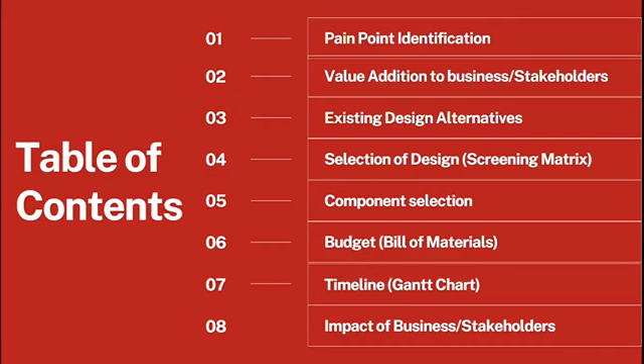The pain point with the current manual labor intensive task is the ergonomic issues with workers experiencing back pain due to lifting of heavy windshields. Furthermore, manual handling of the windshield poses chances of damage to it. Additionally, manual application of the sealant leads to material wastage as well as time wastage.

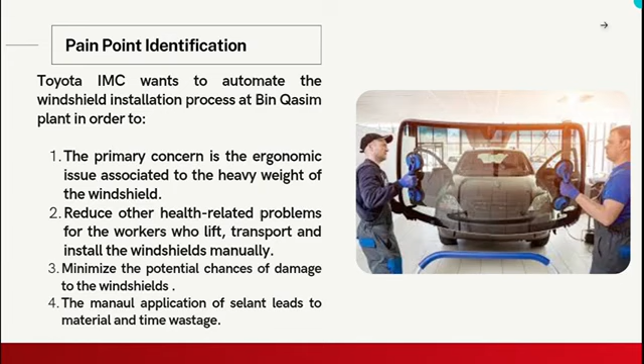Now we identify the value our solution adds to IMC as a business. Enhancing the safety and comfort of the workplace can improve worker satisfaction and morale, increase productivity, lower employee turnover, and result in better retention of skilled staff.

Streamlining the windshield installation process and reducing ergonomic strain on workers can improve overall efficiency. This leads to faster production times and lower costs with reduced material wastage of the sealant. Furthermore, increased expenses may arise from ergonomic problems as a result of worker injuries, lost productivity, and possible legal liability. Our solution would lower these expenses and boost the bottom line by proactively addressing these problems.

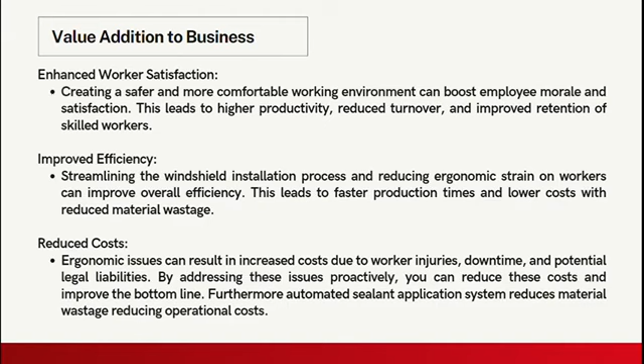Moreover, material wastage is decreased by automated sealant application systems, which lowers operating costs. Additionally, the automated system reduces chances of human error, increasing the quality of the windshield installation. This leads to less work for the quality control department as well as lesser warranty claims.

Furthermore, exhibiting a dedication to ensuring the safety and well-being of employees can offer a competitive edge. It can improve the company's standing as a responsible and progressive one, drawing in clients that respect morality and environmentally friendly business methods.

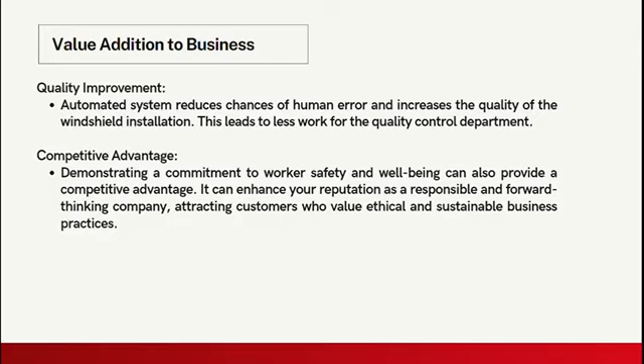We now talk about our system. On a broader level it can be broken down into two subsystems: the sealant application system and the transport system. The sealant application system applies the sealant on the windshield, and then the transport system lifts it from the sealant application station and transports it towards the car, where the worker slides it down and installs it on the car.

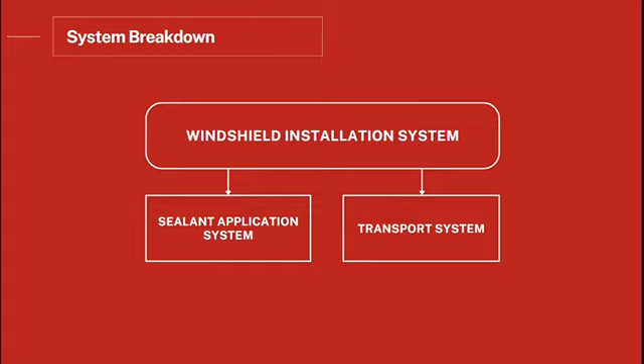We'll explain the system in detail in this presentation. We first go into the details of the sealant application system.

Currently, industry around the globe utilizes 6 degrees of freedom industrial manipulators for applying sealant to the windshield. Industrial manipulators offer a number of advantages: they are very time efficient and can accurately trace out the sealant trajectory, minimizing material wastage. Furthermore, they are very suitable for higher throughputs. However, these robots require their own space and cannot operate in industries where space is constrained. Moreover, they are very power hungry and also very expensive, leading to higher capex.

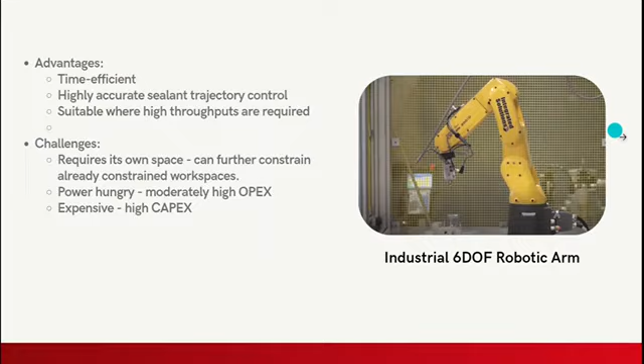On the other hand, another solution that could be used for sealant application is an XYZ Cartesian gantry, much like the 3D printers we see. The advantages are that it's a low-cost solution, highly accurate for sealant trajectory control, suitable for higher throughputs, and suitable for constrained space where you need a low spatial footprint. Furthermore, it has very high repeatability for programmed paths like our windshield trajectory. But it's a power-hungry system and does have a moderately high OPEX.

We now do a detailed comparative analysis of the two methods. Both can be used for highly accurate sealant trajectory control, so how do we compare them? We compare them based on the need we have: we need to apply the sealant to a windshield, so the workspace or movement area of the robot we require is more like a cube rather than the spherical area that a 6 degree of freedom arm covers. Therefore, an XYZ Cartesian gantry is much more suitable in this regard.

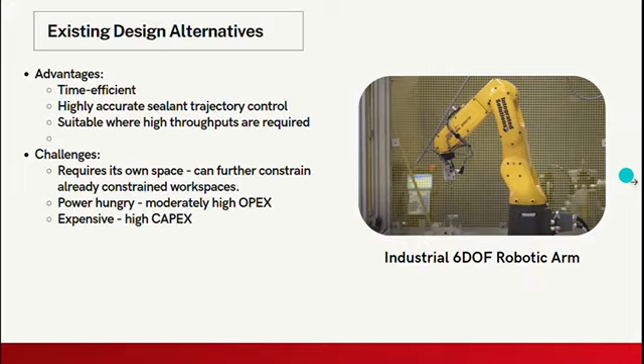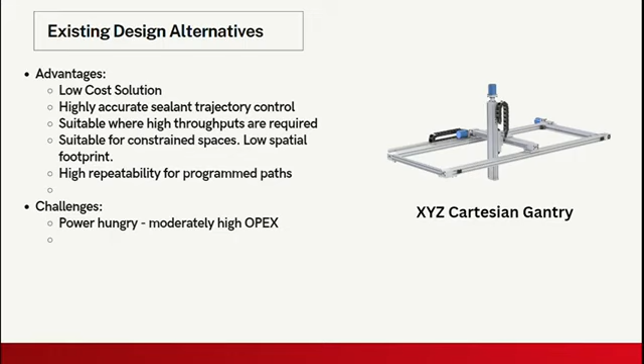Furthermore, if we talk about stability, an industrial 6 degree of freedom robotic arm cannot have a human inside its workspace—it is not safe for a human to interact with the arm, as it can be unstable at times. Therefore, an XYZ Cartesian gantry presents a much more suitable solution, because its workspace is constrained, and therefore it's safe for operation.

An integrated design concept consists of a number of ideas combined together. We first generated concepts for each component, then pruned them, and after selecting the best out of them, we came up with these integrated design concepts.

These integrated design concepts comprise compressed air actuators, using actuators that use compressed air, a pneumatic valve for release of the sealant, and a microcontroller to control the system of our sealant application.

We have a robotic gantry with pressure regulator, and a robotic gantry with hydraulic valve. So basically these are all our integrated design concepts.

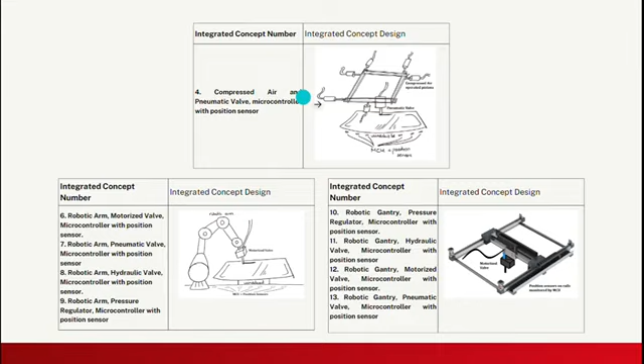After discussing a number of integrated concept designs, we had to screen our concept designs to see which was most feasible for us, ranking them against the product objectives.

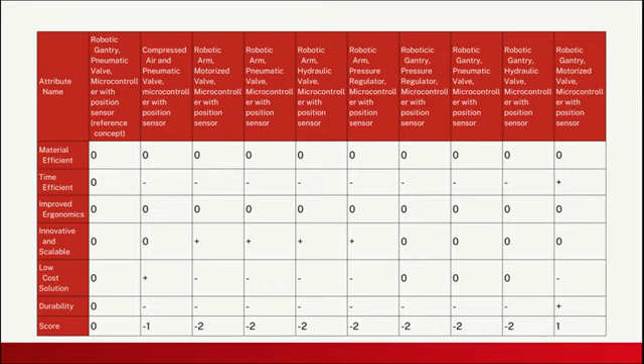Material efficiency, time efficiency, improved ergonomics, innovation, scalability, low cost of solution, and durability were all considered as product objectives. After ranking and rating each of these, we found that the robotic gantry system with a motorized valve, microcontroller, and a position sensor was the best and most feasible solution.

After selecting our final design, we had to break down our system into a number of components, such as the frame, the motor required, the nozzle, and the controller required for the entire structure.

We decided on aluminum extrusions as the main frame structure, having a max tensile strength of 45,000 psi, yield strength of 40,000 psi, and a frame density of 2,710 kilograms per cubic meter.

The motor we decided on was a CloudRay closed loop stepper motor. It has the advantage of a high torque output of 12 Newton meters, power consumption of 360 watts, max RPM of 4000, and a motor resolution of 1.8 degrees.

As for the nozzle, the most important part of this system, we chose the Nordson Auto-Flo sealant valve, which has a maximum fluid pressure of 5000 psi and actuating air pressure controlling flow of 60 to 120 psi. It can withstand cycles up to 40 million, and has a very low maintenance downtime of 2 hours.

To control the entire system, we have a Jetson Nano by NVIDIA, with 40 GPIO pins, an ARM Cortex processor, a power consumption of a mere 10 watts, and expandable memory so that many trajectories could be stored on a single controller.

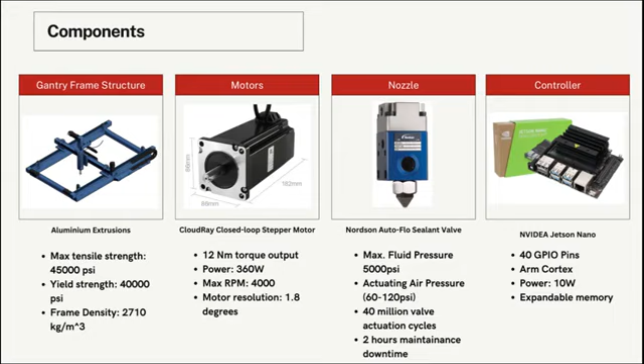Now we move on to deciding the timeline for the entire project using a Gantt chart. This is the structure of the Gantt chart, where on the left-hand side we have listed the possible activities needed in order to build the entire structure.

In June, we will be working on designing the gantry structure and building a CAD model. This will be done by team member Zaryan. Simultaneously, team member Shameer will be working on deciding the motor, procuring the motor, and testing it to ensure it meets our requirements.

In July, we will also be working with IMC on procuring the parts and getting feedback on the CAD model we built. Simultaneously, team member Shameer will work on designing the sealant dispensal system and the CAD model of the nozzle and related components for the system.

In August, if we are able to get the parts within 1.5 months, we will then work on assembling the system and testing the components we have achieved. This is the entire breakdown of our Gantt chart.

The expected tentative ending time for this project is the end of April, after complete testing to our own satisfaction and quality standards.

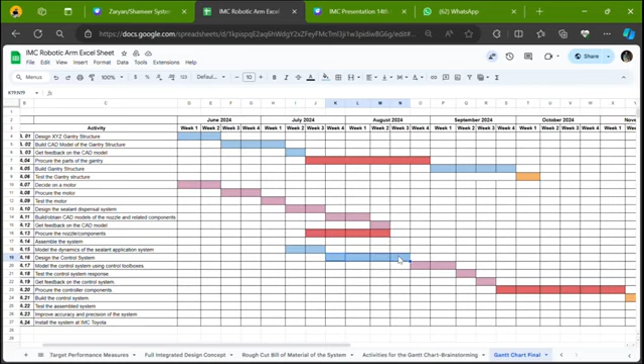We have kept a time of 1 month for designing the control system, and we have allotted most of the time for testing the system to ensure that it meets quality standards, is safe, and most importantly cannot cause any unnecessary harm to people using it. This will all be done throughout the testing process.

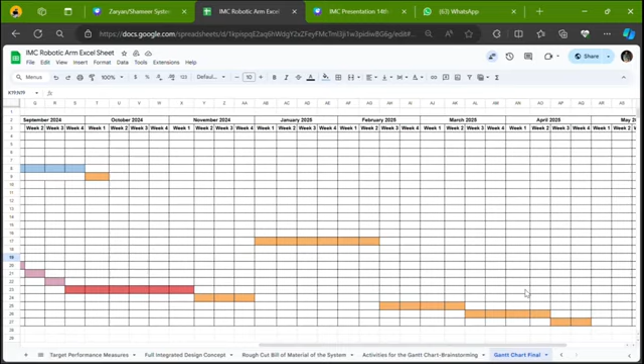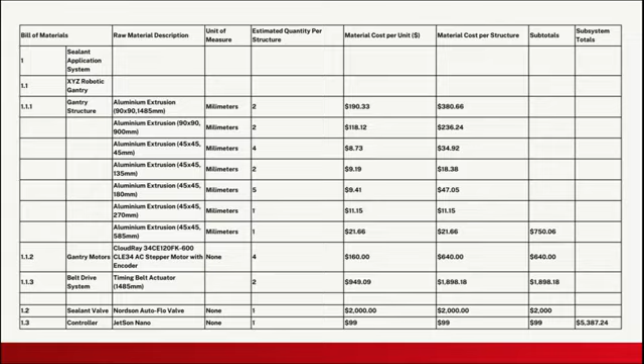Now we present the budget, the rough cut bill of materials. For each of the subsystems, the structure, the motor, the belt drive system, the sealant valve and the controller, we have listed the quantity needed per structure, the material cost per unit, the material cost per structure, the subtotals and the subsystem subtotals. We have estimated that the sealant application system itself will cost $5,400.

We now move on to the second system, which is the transport system. We researched a number of existing design alternatives, the first being a monorail track system. This monorail system has the advantage of being space efficient, with simplified installation as opposed to a gantry system, which is very large and requires a lot of space. It's suitable for the linear transportation of windshields within a defined path.

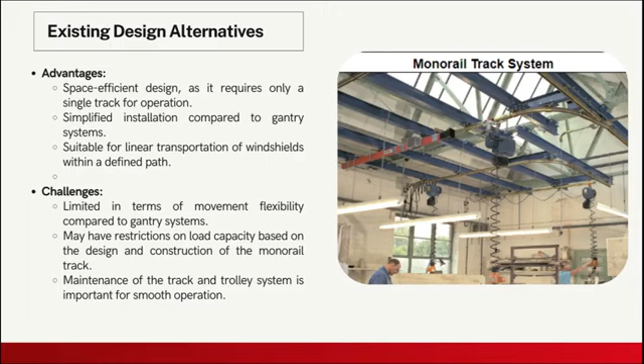However, it is faced with some challenges, such as limited movement flexibility compared to gantry systems. It may have restrictions on its load capacity, and maintenance of the track and trolley system is crucial for smooth operation. Any gap in which the system is not maintained properly can be detrimental to its performance.

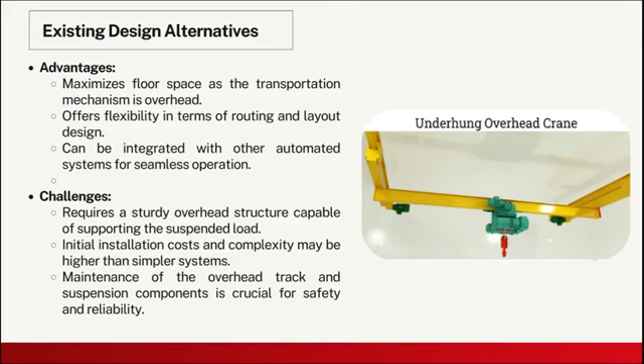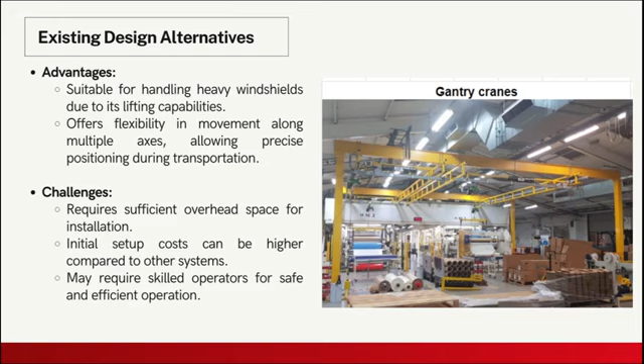The third and final design alternative is a gantry crane system, suitable for handling heavy windshields because of its large and great lifting capabilities. It offers a lot of flexibility through multiple axes, allowing precise positioning during transportation. However, similar to the last structure, it requires sufficient overhead space for installation, and the setup cost or capital expenditure can be very high compared to other systems. Additionally, it may require skilled operators for safe and efficient operation.

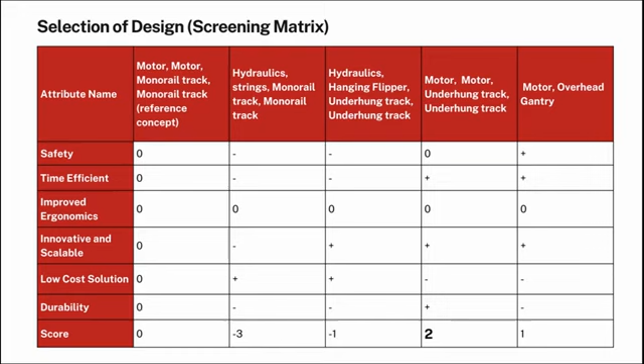Having discussed these existing design alternatives, we started working on our own designs and came up with 5 integrated designs. After ranking them against product objectives such as safety, efficiency, ergonomics, innovation, scalability, low-cost solution, and durability, we found that the system having a motor underhung track had the highest score. Therefore, we decided to go with this system.

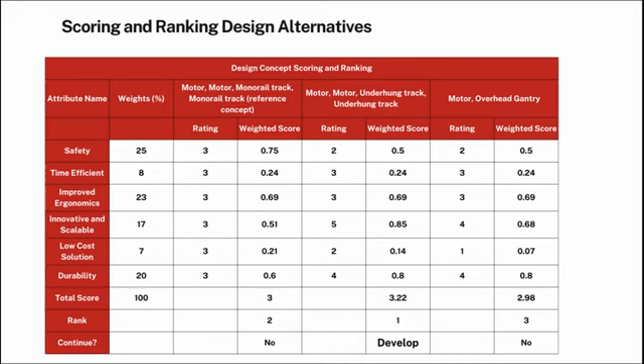We then ranked the designs we had obtained against each other in terms of the weights given to their different product objectives, the rating we gave them, and the weighted score achieved. We found that the solution most viable to develop was the motor underhung track system.

Now we shall break down our design into its components. The first requirement is a conical rotor motor, a three-phase AC asynchronous motor with a rated power of 0.75 kilowatts, a weight of 10 kilograms, a 2.5 Newton meter torque output, and a speed ranging from 2800 rpm to 4200 rpm. The second component is the vertical beam, which provides structural support to the entire structure and is made of steel. Its dimension is 10 by 10, and its weight is 10 kilograms.

The third component, the hoist motor, used for lifting the windshield, is a 1150 watt powered induction motor with a lifting capacity of 150 kilograms and a speed of 1200 rpm. The final and most crucial component, the PLC controller, ensures precision control and safety features.

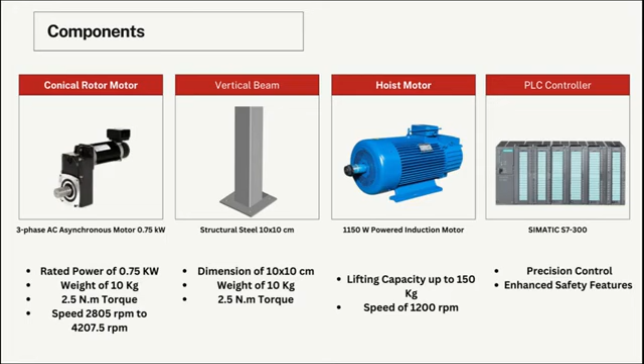Through our literature review and by analyzing existing solutions and the needs of the problem, we developed a rough cut bill of materials for our proposed solution of windshield installation in an unconstrained environment of the assembly and production line. The rough cut bill of materials has been finalized for each subsystem and contains every essential detail about the raw materials, components, and systems being used.

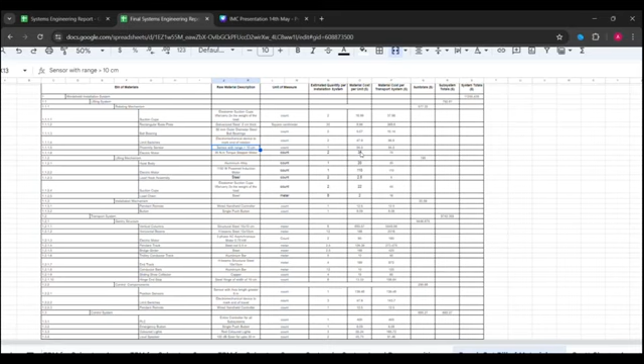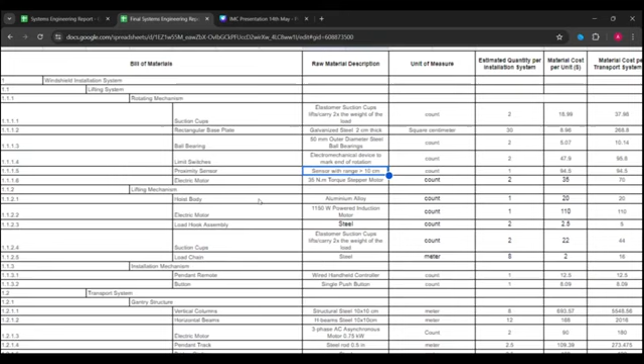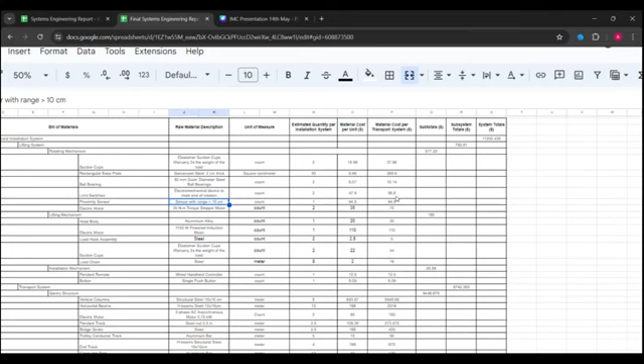However, BOMs give a rough idea of the estimate of the funds required for the entire system, which are tentatively finalized. Slight modifications can be needed as the project progresses, or if the cost of the material varies until the procurement period.

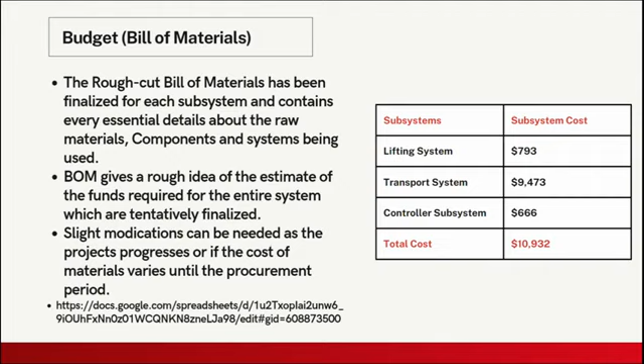The CAD models required for our transportation system will be for the gantry structure and for the windshield holding plate. Other than that, there will be motors which will also be structured on the gantry structure, because they will be fitted there in the actual project as well.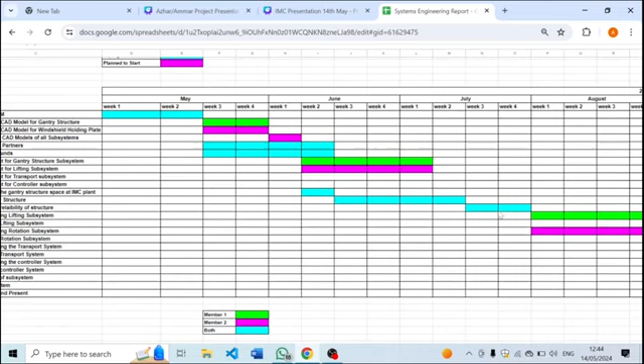Then identifying the gantry structure — the procurement lead time is generally 2 to 4 weeks. If we receive our materials a bit earlier, we can start building the gantry structure earlier, and by the end of July we can basically complete its construction, or if not, it can go ahead by a week or two. Then testing the reliability of the structure, to see if it's able to lift that much weight or not, will be done in the additional 2 weeks given, the last 2 weeks of July — week 3 and week 4.

Now from August onwards, the actual work on the project is starting, which is building the subsystem. The first subsystem, the lifting mechanism, will be manufactured by member 1, and simultaneously member 2 will be working on the rotation mechanism.

Both members are given 8 weeks, which is August and September 2024. Then an additional month is given for each member to test their systems. During October, the lifting subsystem and the rotation mechanism will both be tested, 4 weeks of October.

So these 3 months cover the lifting and rotation mechanism, and simultaneously in August we will be procuring for the next 2 systems, the transporting system and the controller system. We start procurement during the 4 weeks of August, and by the end of October we will have materials.

These markings show that documentation work is also going on along with building the subsystems. So as the members work on their subsystems separately, they are simultaneously working on documentation as well.

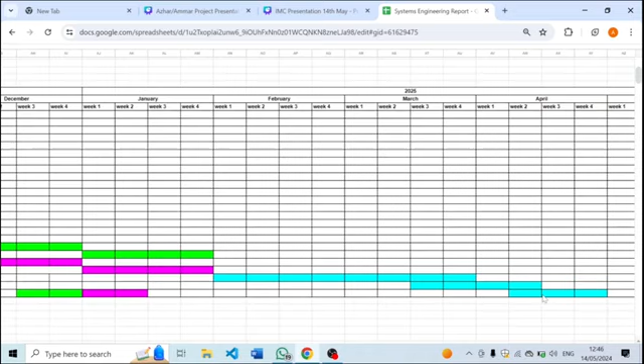In the last 3 weeks of April, from week 2 through week 4, we will be documenting the entire project, and that is when the project will hopefully end if things work well. That is it, thank you.

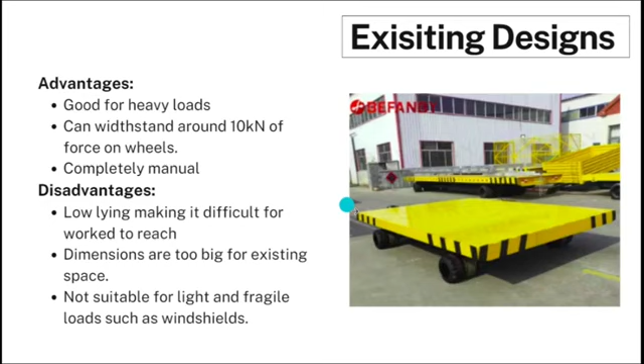Next we have another cart, but this time electrically powered. This removes the manual motion of transportation, as the cart moves by itself. Again, because it is so low lying, it will be difficult for workers to lift the windshield up, and it also consumes a lot of power, around 1.5 kilowatts, which is heavy on the system.

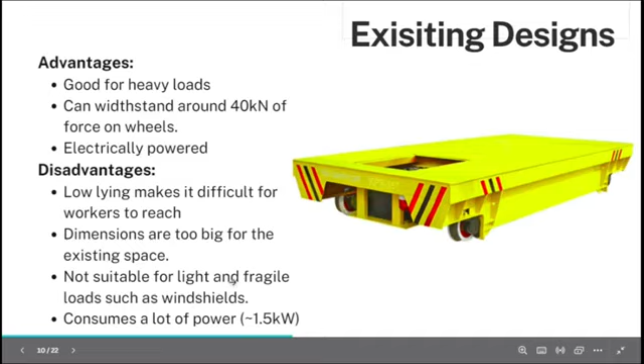Then we have the third option, a conveyor belt on which the windshield could move. It can handle a decent amount of weight, and the dimensions are adjustable during the order, so it was better than the other designs. However, the main issue is that if we place a windshield on this conveyor belt, there's a chance it might be damaged due to falling or slipping off, and because it's such a big structure, it might obstruct the assembly line.

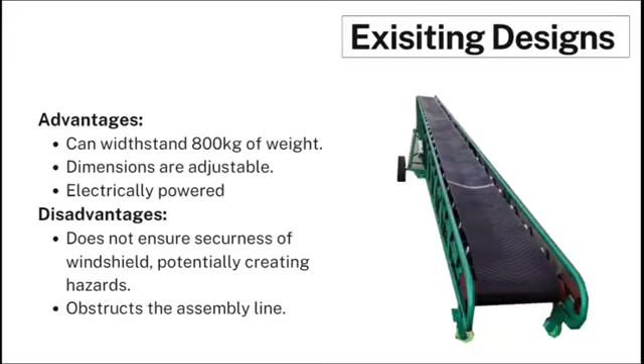So the design we came up with is a kind of combination of the two. Basically, what we're trying to do is make an inclined plane upon which a...

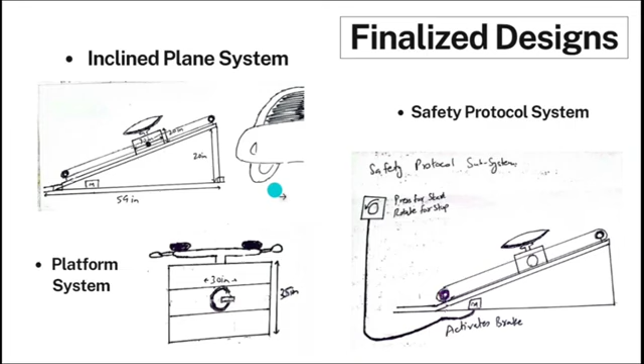So before coming up with a final design, we also looked at various designs and compared them with each other to see which one was the best.

This was our reference design, which is the one that got selected. The other designs would include a switch used to open a system, sirens to indicate emergency, and mechanical tracks to move the system. But we decided these would not reduce stress on team members as much as our reference design would. Also, the automation would be lacking, and it would take more time.

Similarly, we also had an idea for maglev tracks or electromagnetic tracks, but they were causing a lot of safety issues regarding the current flowing through the tracks, and the cost would be much greater compared to the reference design. We also had an idea for karakuri, which was better for cost and gave nearly as much automation.

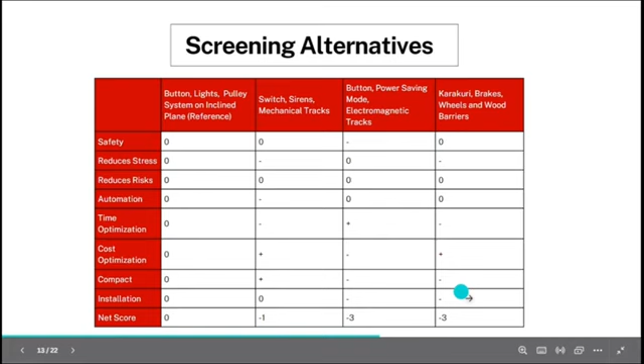After working extensively on a system engineering report, we have come up with the following components for our system. The inclined plane system consists of an angle adjustment mechanism, brakes, steel for constructing the inclined plane, rubber, a DC motor, and a pulley and pulley belt system.

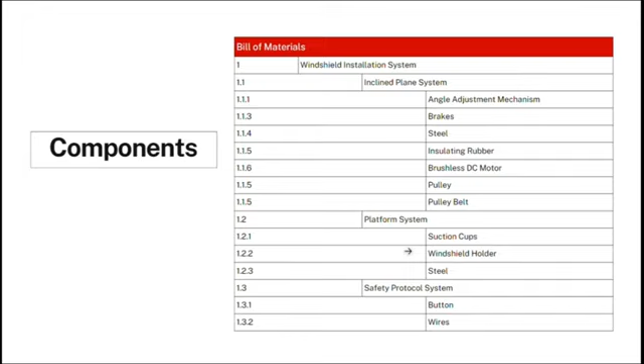These are the components which we are aiming to employ in our system. For the inclined plane system, we have angle adjustment, brakes, insulation, motor and pulley.

Angle adjustment will help in customizing the incline for enhanced comfort during operations. Brakes within the system will help in maintaining platform stability and prevent any undesired movement beyond operational requirements. Insulation will help further in prioritizing the safety of assembly line team members.

By incorporating effective insulation measures, it will help further in mitigating the risk of electrical hazards within the workspace, whereas the motor and pulley help enhance operational efficiency, enabling smooth and efficient movement of the platform along the incline, thereby optimizing assembly line productivity.

Moving to the next, for the safety protocol system, we have buttons and wires. Emergency shutdown buttons will help in enabling swift and decisive actions in critical situations by providing accessible emergency shutdowns, ensuring immediate halt of the system.

Wiring for control panel connectivity will facilitate coordination and control by connecting the panel and control panel to the operational components, ensuring efficient workflow.

For the next and last, the platform system, we have suction cups and stainless steel. Suction cups ensure precise windshield placement and stability on the platform, giving us a secure windshield holder mechanism.

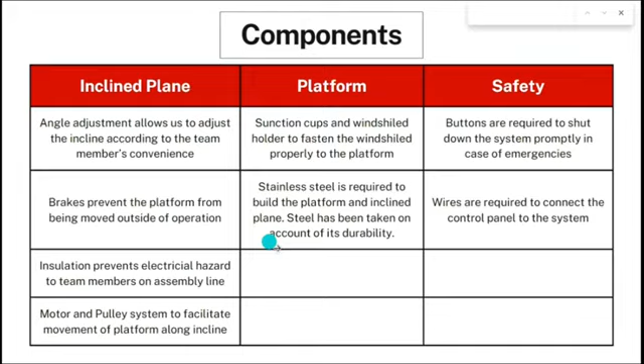The angle adjustment mechanisms: four will be in use, and one costs $5, so that's a total of $20. One brake will be used to make sure the platform stays in place, and that costs around $50.

The steel required: we're going to use 5 sheets, which are 4 by 8 feet each, and one of them costs $1.76, so that's a total of $8.80.

The rubber being used is 2 sheets, each 1 square meter, which will be enough to cover around 60 inches of the inclined plane.

For the brushless DC motor, we're going to use 2 DC motors, one for each side, and they're going to be synced with each other. The pulleys, since there are these motors, will be 4 pulleys based on either end and both sides, and those cost $15.

For the platform system, the suction cups we'll use are already present at Toyota, so that won't cost us any money. The windshield holder as a whole is also available at Toyota, so that also won't cost us much. So the only cost for the platform is the steel to construct it, which will again cost $8.80 for 5 sheets.